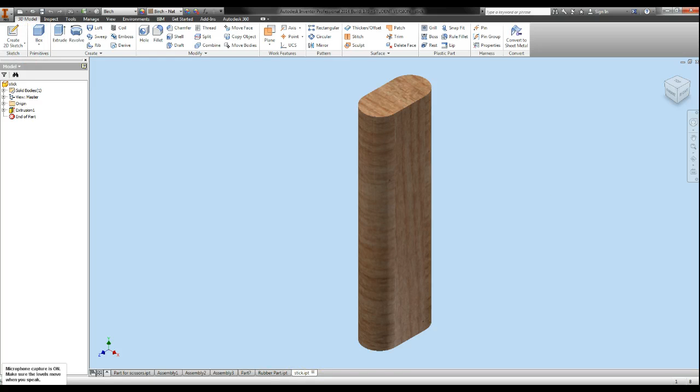Right now, this is going to be part 2 of making the rubber mallet. So you see the stick and the rubber part. What we want to do now is...

Go to new and click on assembly. We'll open up the screen and we want to place the first part, which would have to be the stick. Put the stick down. There you go. We don't want another one of those like the scissors, but we just wanted one.

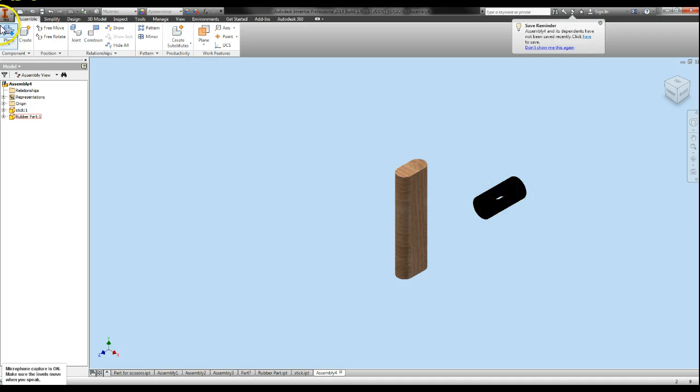But now what we want to do is get the rubber part and put that just right there. But now we want to constrain this to this. See.

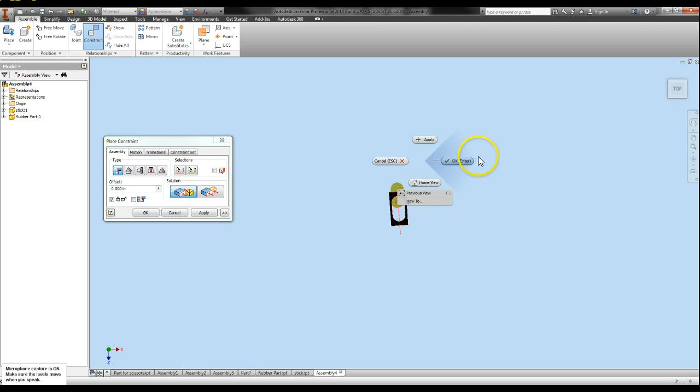This is actually really difficult. We want to get the side view of this, just onto this. And that's actually what the rubber mallet would look like.

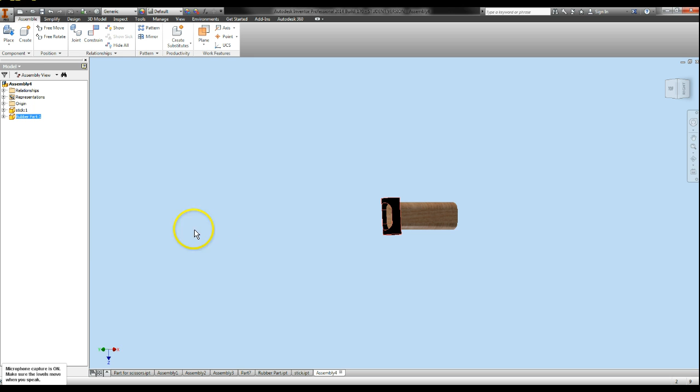We just go around both parts. There's that crown. And then we get the stick and we go around that. And then we look from the side. It looks a little bit bigger than it had to be.

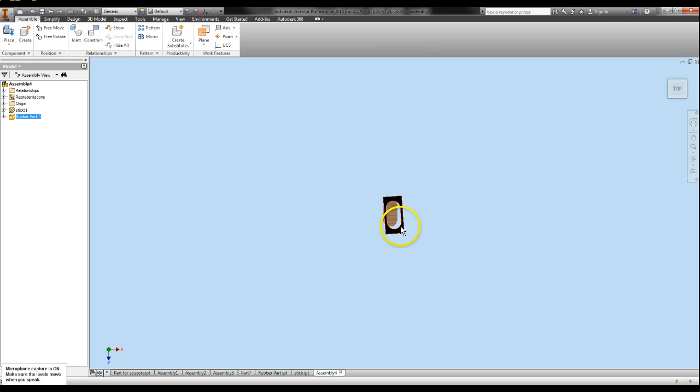But now what we want to do is fix some of the mistakes that we made in the actual thing. So what I want to do first is freely rotate this.

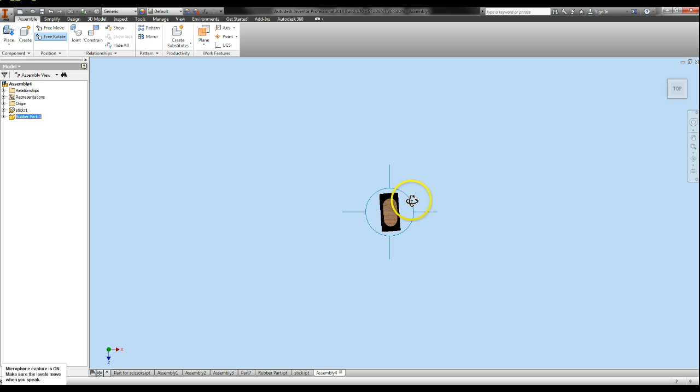Okay, and now what we want to do is look at this from the side. As you can see, the stick is a little bit too big, too long. Want to make it a little bit thinner, so that's what we're going to do. And then we're going to have to fix the mallet up a little bit too, to make that circle a smaller circle. Okay.

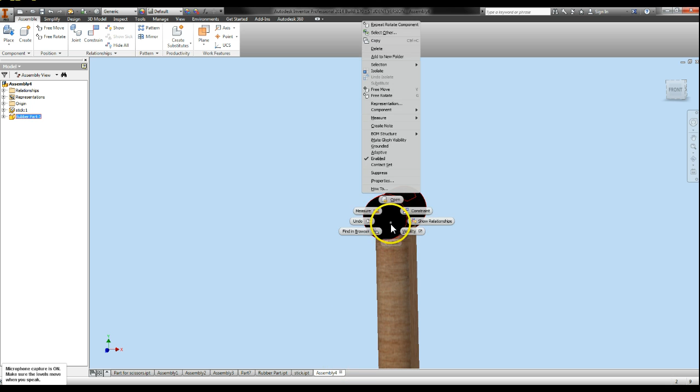So this is a simple fix. Whenever you want to fix something, you can just scroll over here, and then you could just be like, okay, I'm not going to do it that way. I'm going to go to the stick.

We made it a little bit big, so what we want to do is go to extrusion one and edit the sketch. You see that we made it a little bit too big, so maybe instead of 1.5 inches, we take that back and make it about 1 inch.

And we made it a little bit too long, so instead of 1.5 inches, we're going to make it about 1.25. Now we're going to finish the sketch. Boom. Now see how it looks on assembly.

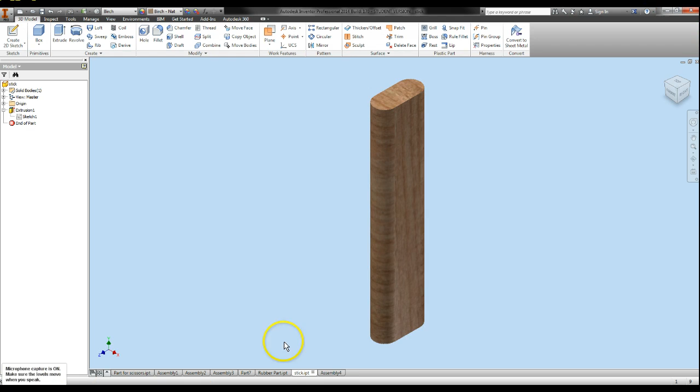As soon as you're done editing an item, as soon as it's finished, it will make the object smaller inside of Autodesk.

Now what we want to do is go to the rubber part, and go to extrusion one, and go to edit sketch. As you can see, we get this.

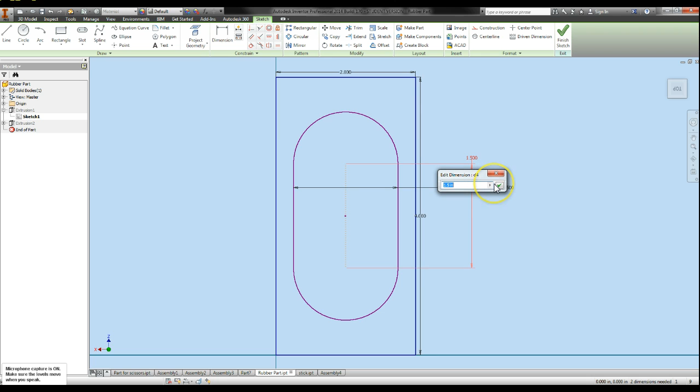So we changed this from 1.5 to 1.25. Then we changed this to 1. Then we can press, just make sure that's centered again. Now I'm going to finish the sketch.

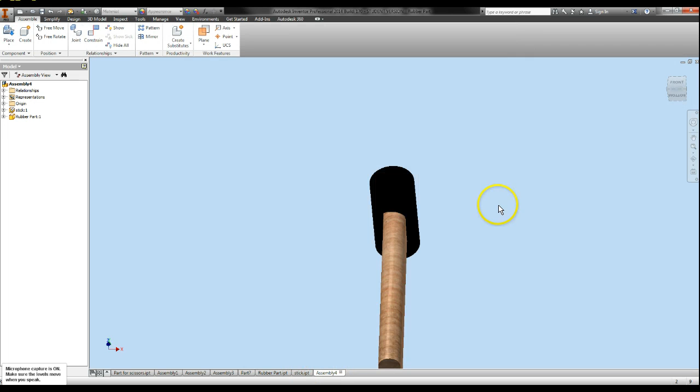Boom. Now we can look at the assembly and we can see it. And now you can see how it looks just a little bit better.

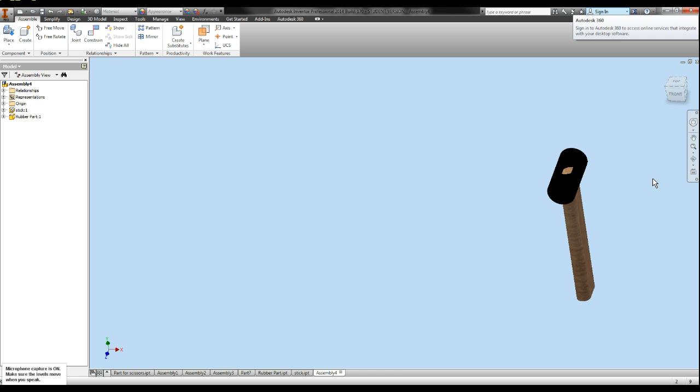Sorry for the lag, I occasionally do get those, but what I'm just trying to show you is that this is a rubber mallet, but I think I messed up something on the rubber part because I think I just made it a little bit smaller on the actual sketch. 1.25, 1, 2 inches, yeah, no, I didn't. It's just how it looks.

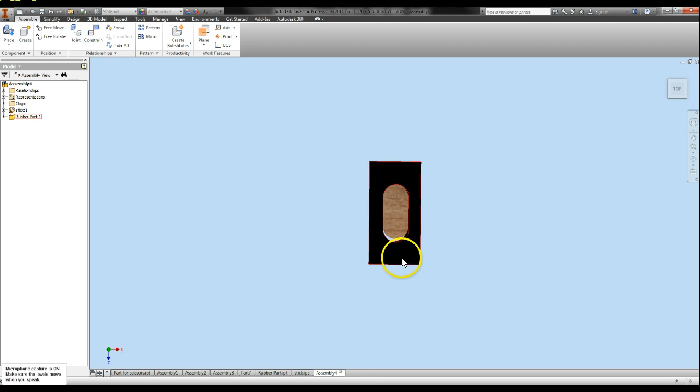Top view, you can see it's a little bit off, so I'm going to move that. I want to ground it. So say if you were just trying to make a simple viewing of the object, you can kind of get it right out of here.

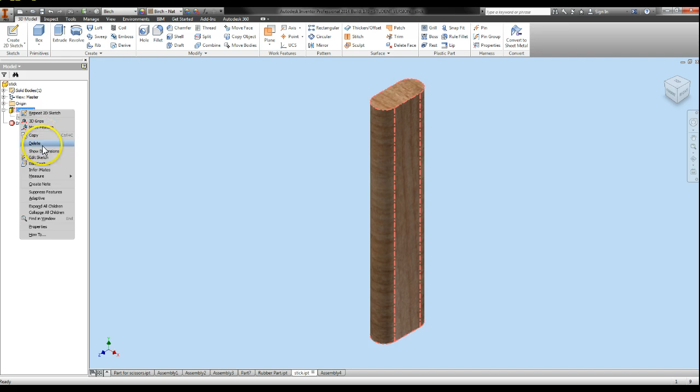This looks like it's still a little bit big, so let's just go back and edit this stick a little bit. What we want to do is go to the extrusion one, edit the sketch. Instead of 1 inch, we want to make it maybe 0.5 inches. And then instead of that, we want to make it about 1 inch long. And we're going to just say finish 2D sketch.

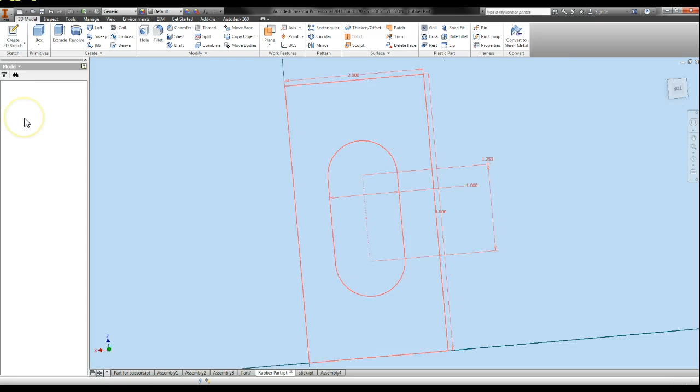It turns into that, and then we get something like that. Now we'll have to fix the rubber part, so now we want to open sketch 2, come over here, and change 1.25 into 1, and then change the width to 0.5. And we want to make sure this is centered again. We'll finish the sketch.

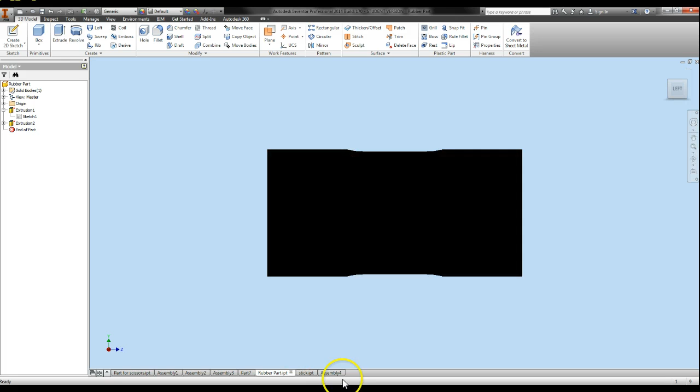And we'll go to the assembly and we'll see how that looks a little bit better.

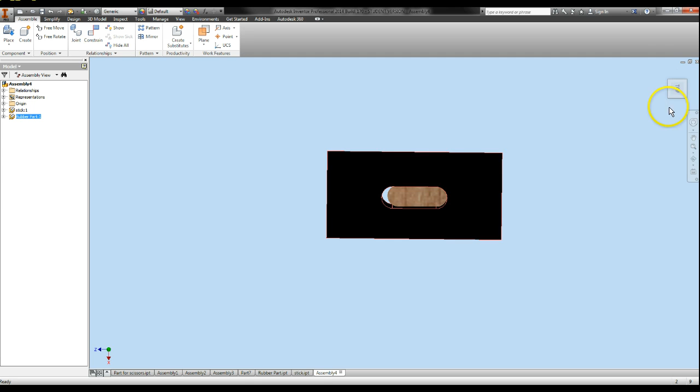But yeah, this is how you can make a simple rubber mallet. This is just to help you again, like I said, in understanding assemblies and how you can use them. That is how a rubber mallet looks, and I think it's a pretty well job.